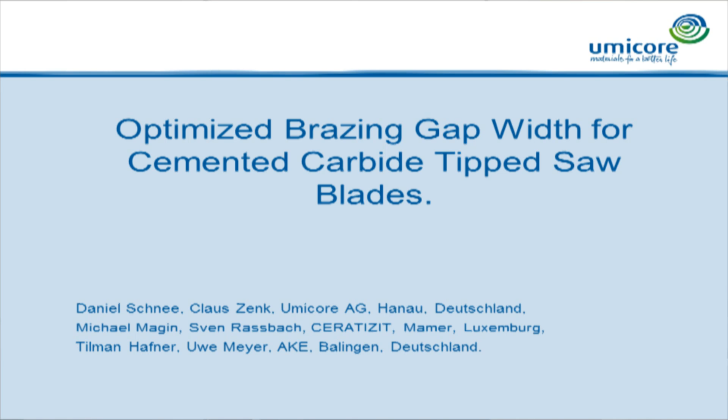One company is Ceratizit from Luxembourg, which is a manufacturer of cemented carbides, and then the other company is AKE, also from Germany, a producer of saw blades.

A saw blade is a steel blade which has many cemented carbide tips brazed on, and there are different kinds of brazing filler metals used to do the brazing job. This can be normal brazing filler metals, but also some special brazing alloys which can be seen here.

Here you can see the steel blade, and here the cemented carbide tip, and in between is the brazing filler metal, a special brazing filler metal. You can see some red color, some copper in between.

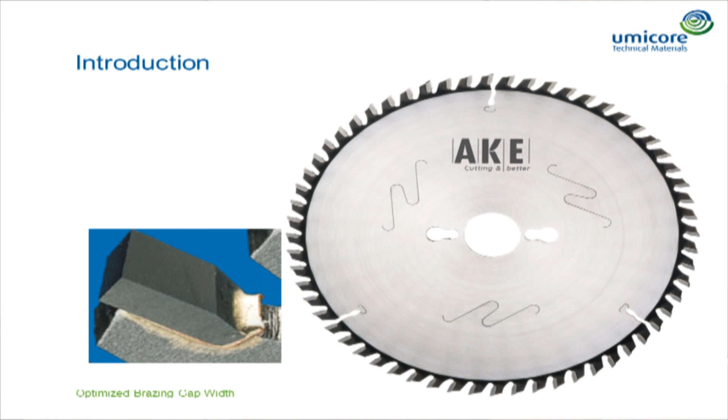These brazing filler metals are called sandwich brazing alloys, and they consist of three different layers. There's a normal brazing alloy layer which makes the connection to the steel, an intermediate layer of pure copper or a copper alloy, and again another brazing alloy layer on top, which makes the brazing joint to the cemented carbide.

What is the reason for using these special sandwich brazing alloys? The reason is the different thermal coefficient of cemented carbide and steel. This does not have any effect during brazing, but after brazing, when the part is cooling down, this can result in stresses.

The cemented carbide tips are a brittle material, and they don't like tensile stresses. This can lead to failures. The job of this copper layer in between, because it's very ductile, is to take over these stresses and protect the tip from cracking.

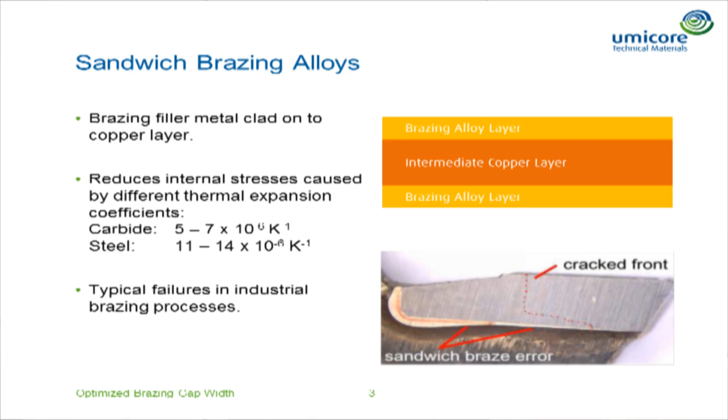But beside these products on the market which can protect the saw tips, we can still see some failures in the industrial field. Here, for example, you can see there is an uneven and inhomogeneous copper layer in between. These kinds of failures had been investigated some years ago by our colleagues Magin and Rassbach.

The results of this finite element analysis were presented in 2009 in the Plansee seminar. There you can see the optimum, when you have a very continuous copper layer in between the cemented carbide and the steel. Then you can see different failures, and in the last one you can see the brazing alloy without any copper layer in between.

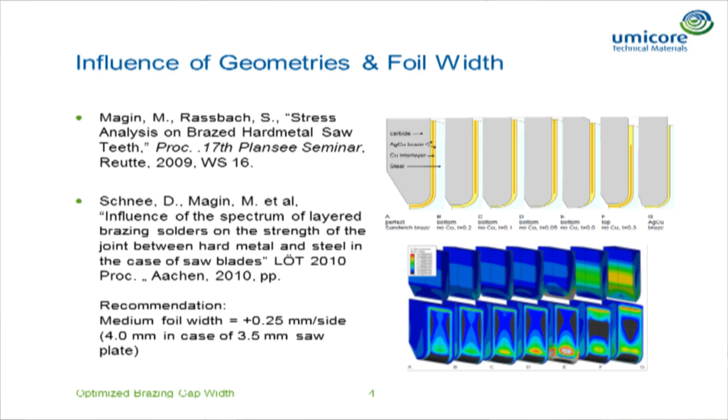On the bottom side you see what happens on the cemented carbide tip, especially on the surface, and you can see the influence of the sandwich brazing alloy directly when you compare it with a normal brazing alloy. There you can see the tensile stresses on the top surface of the cemented carbide, and here you can compare it with the sandwich brazing alloy, and there you can see how it works.

After that presentation, we did an ongoing work. We present the influence, or what is the optimum foil width a customer should use to get the best results after brazing to protect his cemented carbide tips, and that was a result we found during that time.

But there's still an ongoing question from our customers: what is the optimum brazing gap width when we braze cemented carbide, when we braze the saw blades? This is what we try to answer during this investigation, and we did different things: practical tests and finite element calculations.

Based on our experience with other presentations and investigations we made in the past, we decided not to use a real part, and instead decided to use a different kind of specimen: a 4-point bending test. We had two cylinders of cemented carbide with 10% cobalt binder, and here is steel.

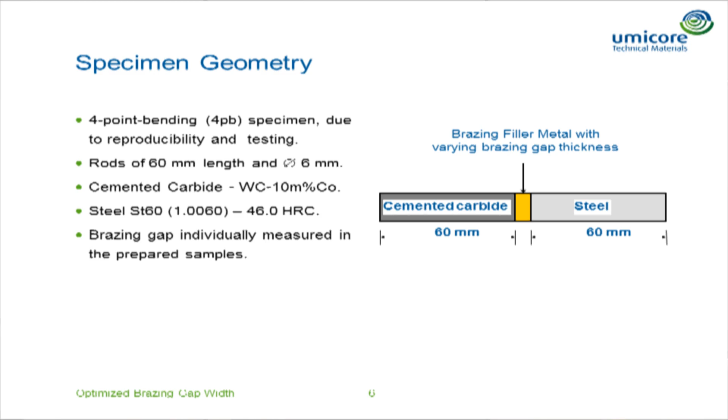In between, different kinds of brazing filler metals were placed. We used three different kinds of brazing alloys. One was the normal brazing alloy.

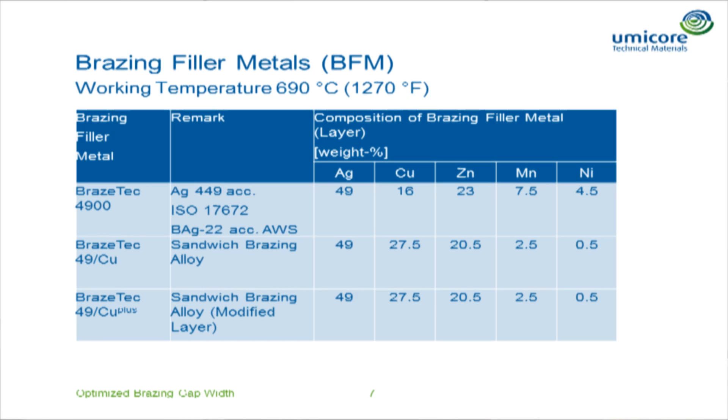According to the ISO standard, or BAg-22 according to AWS. Later on it will always be called BFM449. And two different kinds of sandwich brazing alloys: one is a normal sandwich brazing alloy with pure copper inside, and the other one is with a modified layer in between.

The colleagues made the brazing tests, using different kinds of brazing filler metals with a diameter of 6 millimeters and a thickness of 0.4 millimeters. A flux was applied on both sides, the brazing temperature was set, and the brazing time was set to 2 seconds.

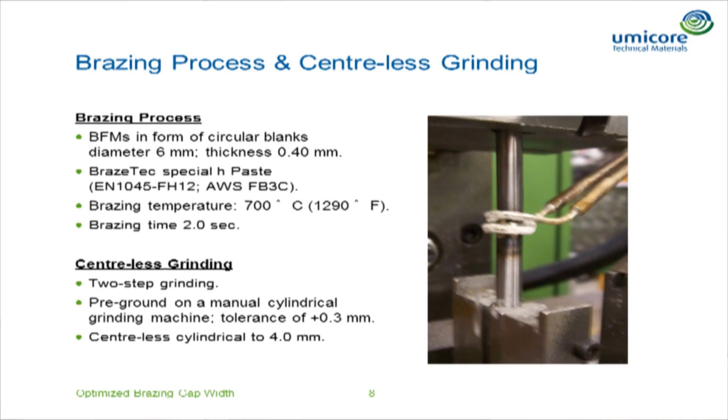They had a special fixture which allows setting the brazing gap afterwards. The part was pressed to a final gap which we want to reach, because we want to create different gap sizes and see how the result is. After brazing, we had a centerless grinding process to grind the parts down to 4.0 millimeters diameter.

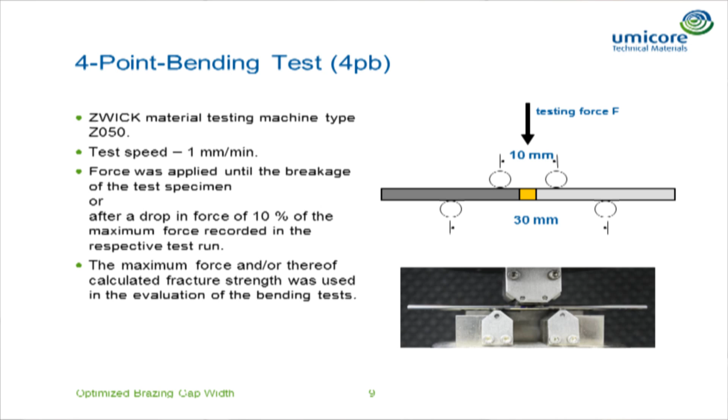After these parts were brazed and grinded, we make the 4-point bending test. Here you can see how the test specimen was placed in between. It was used as ZWICK testing equipment, and the speed was 1 millimeter per minute. We stopped the test after the part broke, or after we got a drop of 10% of the maximum force we applied to the part.

Here I show you a short video, first of the normal brazing filler metal. And very often it broke. Now we go back to the other one. Not so easy.

And now we have the sample with the sandwich brazing alloy in between. As you can see, it's not as spectacular as the other one, but there you can see how the copper interlayer works. It protects the part, takes up the stresses, and makes a plastic deformation. So let's go back.

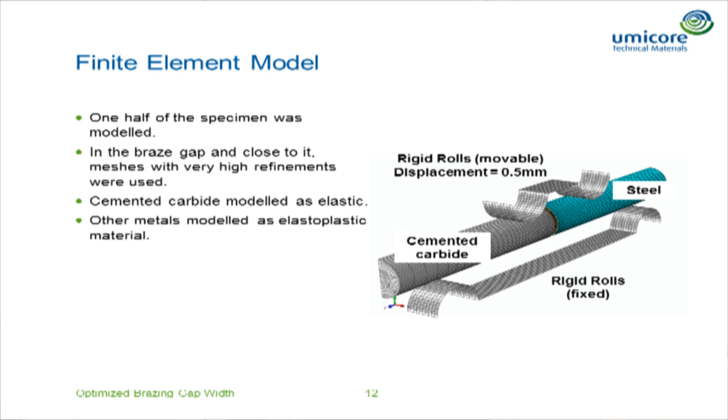Besides the practical things, we also made a finite element analysis and built up a model. We made only a half model, and afterwards doubled it for the calculations. When we get closer to the joint area, the net was set much finer than at the ends. Here you can see the net for the sandwich brazing alloy, where you have the two brazing alloy layers and the copper in between.

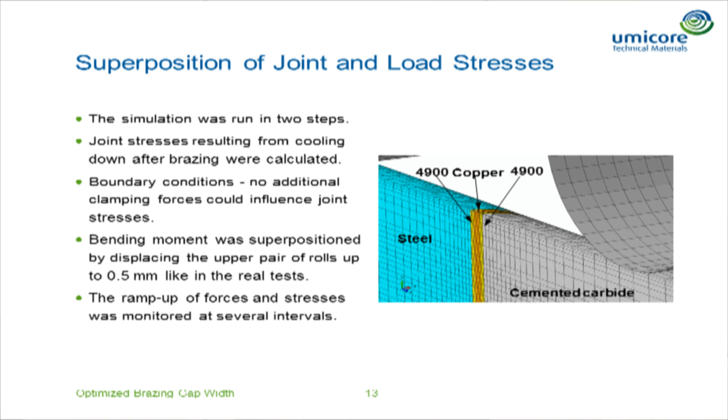What we did was a two-step calculation. First, we made the calculations after brazing and looked at what the stresses are in the parts at that point. Then afterwards, we applied different loads to the part and looked at what happens to it.

Also here a short video to see, but I will only show you the one. There you can see how the simulation works, and it's quite interesting. On the top side, the copper in this simulation, or the brazing alloy, was pressed out, and on the bottom side it was sucked in.

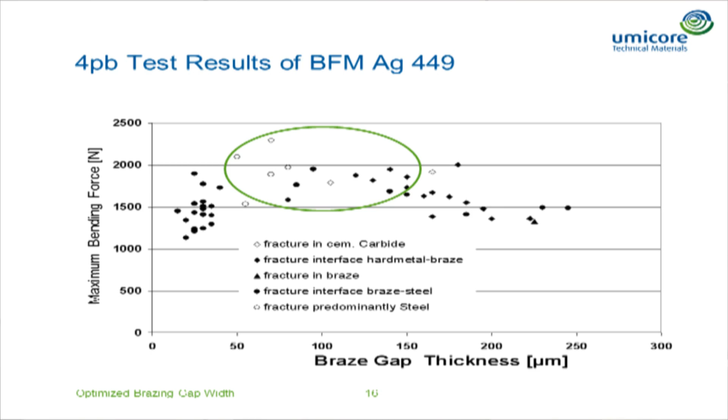We also tried to investigate where we get the failure. When we had very small gap sizes, the failure was mainly very close to the steel side. Then we can see an area with higher values where we could not detect any failures below 1,500 Newton. Then again, the force decreases, and there we get a lot of failures very close in the interface to the cemented carbide. It seems to be an area where we had the highest values, around 100 microns.

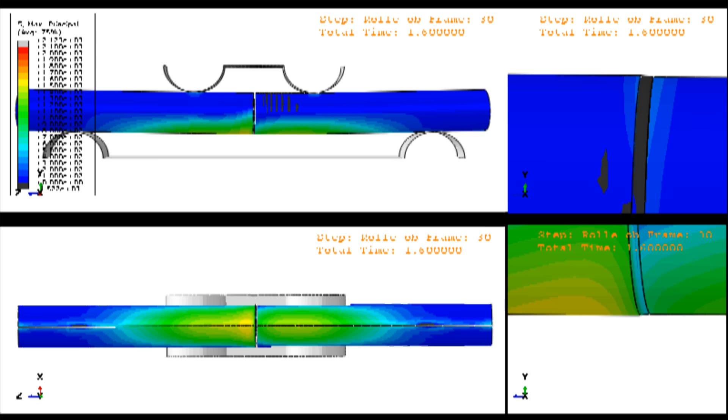Besides that, we also made this finite element simulation, and this is now the result for the tensile stresses. It was too slow. There you can see the effects, and I ask you to remember the colors when I show you the other video for the sandwich brazing alloys.

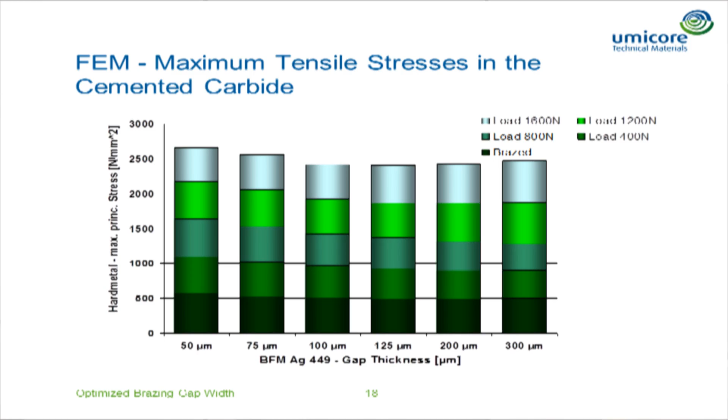Now we have a look into the Mises stresses inside the brazing alloy layer. We can see that we have a higher, more green color, higher stresses at 50 microns, then at thicker layers decreasing, and then when it's getting bigger again, it's increasing.

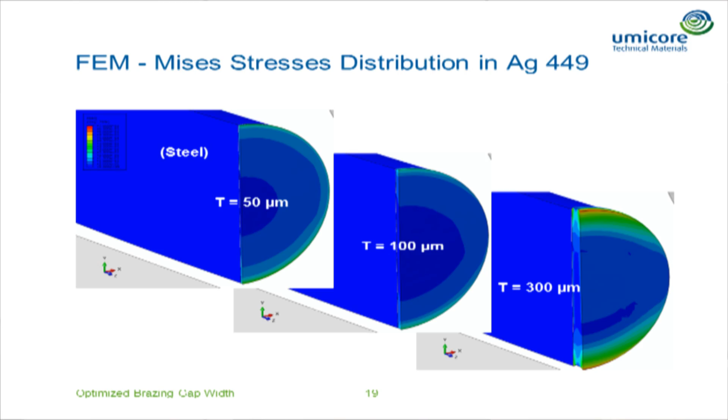This would also correspond to what we found in the bending test, that when we had thin layers, we found a lot of cracks close to the steel, where the brazing alloy has to absorb the stresses coming from the steel. Then we have a medium area, and when it's getting very thick, the alloy also has a different thermal coefficient than the cemented carbide, and there it creates some higher stresses inside.

When we now look at the Mises stresses in the brazing alloy layer, this is quite interesting. After brazing, we can see that the stresses in the thin layers are very high, and then they are decreasing. This is similar to what we found with the small layers, where we could see that the failure was mainly on the steel side.

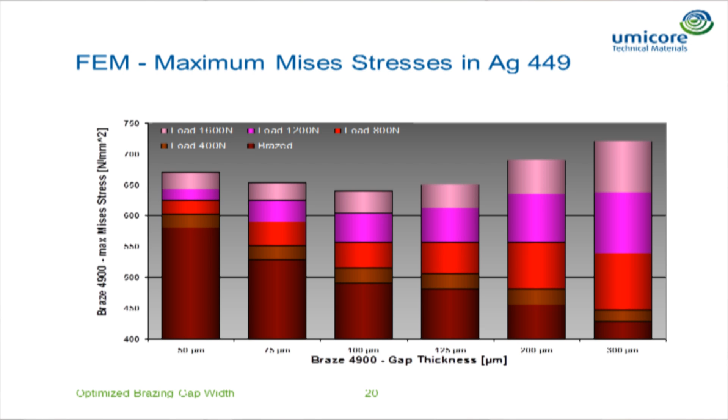Then we add the load, and again we could see that the stresses inside the brazing alloy layer had a minimum around 100 microns. This is similar to our 4-point bending tests.

Now we'll have a look at the sandwich brazing alloys. There it looks like this: again here the brazing thickness, and here the force. What we can see is more of a cloud than any tendency. But what we can see is that there's a difference between the brazing alloys.

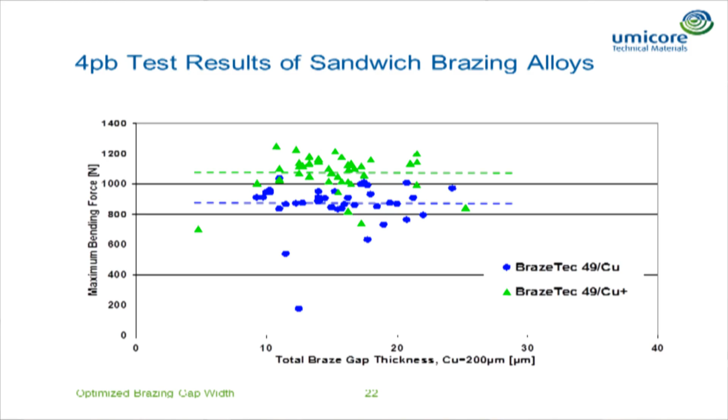One is the normal pure copper, and we use the 49/Cu+, which has a modified copper layer with higher strength. This higher strength, which we can see in our shear test, we can also see here in the 4-point bending, that the average strength of the parts brazed with Cu+ is approximately 25% higher than with the other one.

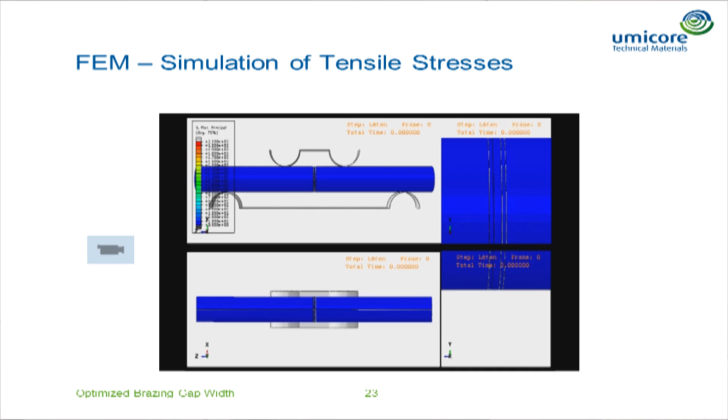But for the gap size, we cannot see any big influence. So these are now the results for the parts. Now let's have a look at the video.

When you now compare the colors against the normal brazing alloy, you can see it's less gray, less red, so you can see how the copper interlayer works and protects the cemented carbide.

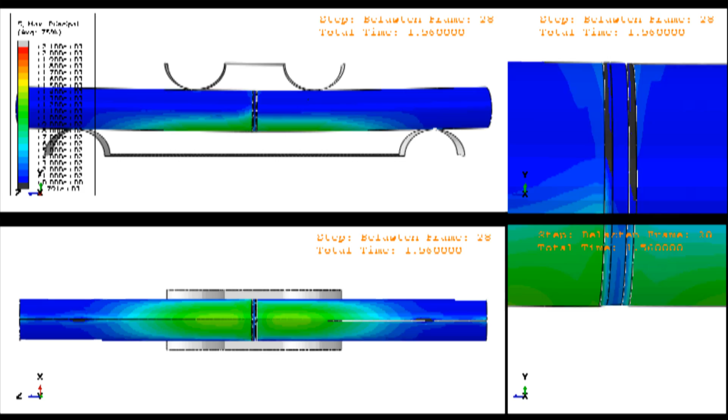When we now look at the results, we found something different. We're now looking at the maximum tensile stresses in the cemented carbide. As you can see, there's not much to show here in terms of explaining how the calculation was done.

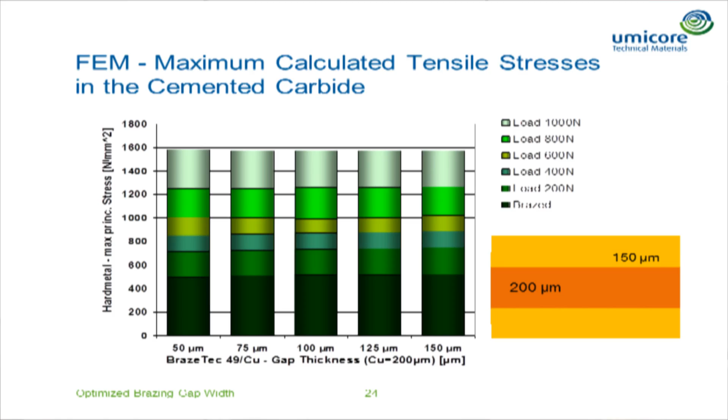The interlayer was always set to 200 microns, and we changed the brazing alloy layer each time, as you can see here, it was always increased. But the size of the gap does not have any effect on the stresses in the cemented carbide.

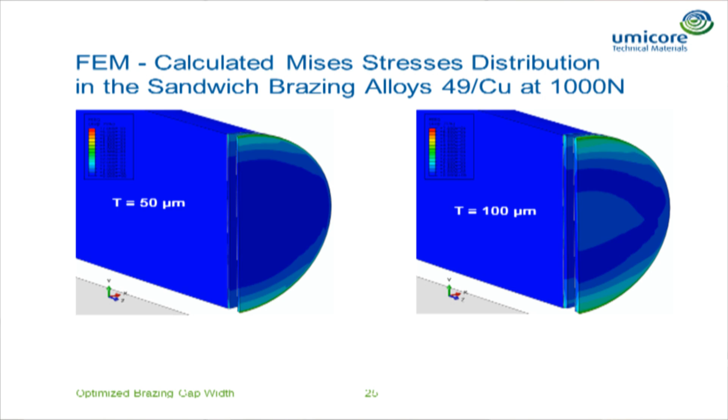When we look into the brazing alloy layer of the sandwich brazing alloys, we can also see only slight differences. We look now also here for the Mises stresses in total. We can see the same tendency for the brazing alloy layer after brazing, but when we put on the load, there's no big difference from 50 microns to 100 microns, only an increase when we reach 150 microns.

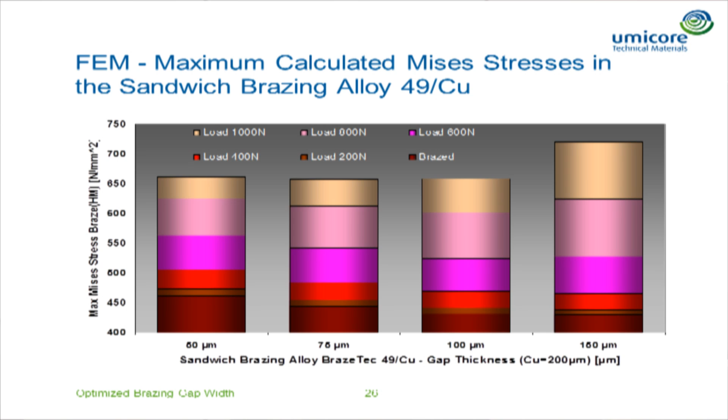Now let's come to the final conclusions. First of all, it was very nice to see that the practical tests and the simulations showed the same results and the same tendencies could be found.

When we look at the normal brazing filler metal without anything in between, we found in our 4-point bending test that we had the highest values at a gap size of 100 microns. And when we look at the stresses, we found a minimum also at the 100 microns. Therefore, the recommendation for customers using pure brazing alloy is that a gap of 100 microns seems to be the optimum in brazing in the tooling industry, which is very often also observed in good parts.

What are the results for the sandwich brazing alloy? There we could not find a big influence of the gap size, but we could find a difference in the sandwich alloy composition. The results we found in the real tests could again be found in the simulation. So we can say for the sandwich brazing alloy, there is not a big influence of the gap size. The strength of the final part depends mainly on the composition of the interlayer which is used.